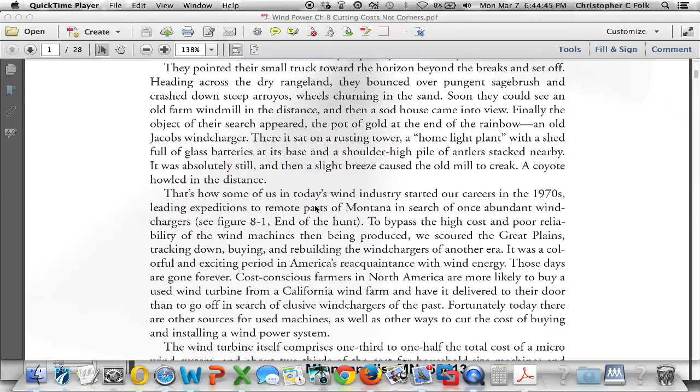What's interesting about this is I think some of this material in this chapter might be a bit dated. And the reason I say that is Paul wrote this book. It was published in 2004, which means much of the research was done in the couple years previous to that. So some of the things he talks about in this chapter about hunting down wind turbines in the Great Plains in Montana and on farms, abandoned in the middle of nowhere, or turbines that come from a California wind farm - many of these machines are no longer available. So because of that, again, I think some of this information might be a bit dated.

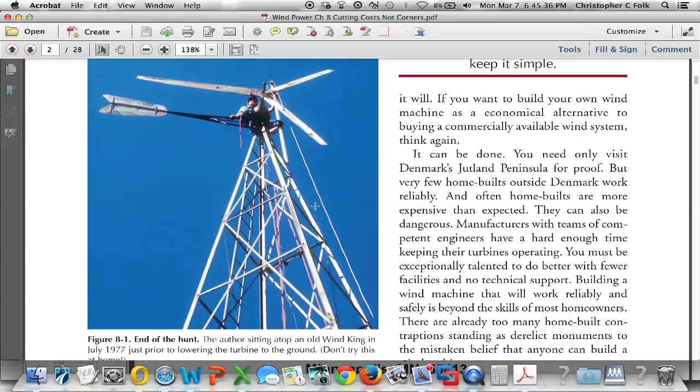As we see some of the photos shown here on the next page, it shows Paul atop of a machine that he found in the middle of nowhere in July of 1977. Not likely that you're going to find something like this anymore.

So I think rather than go through all the examples shown here in the book, I'm going to spend a bit more time discussing some of the machines that you could still find and what they might cost, and then we'll actually use the internet and see if we can find a couple examples of those.

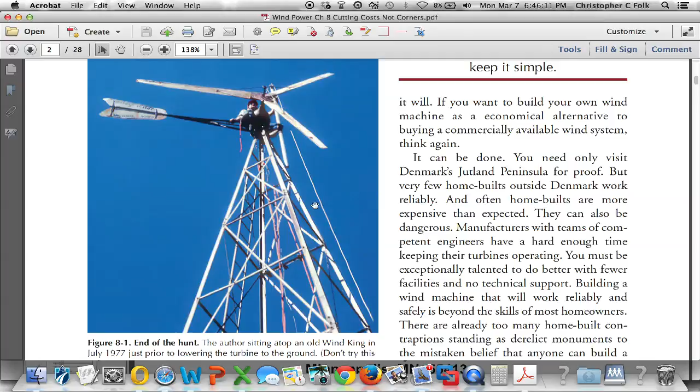So the first thing that he covers is to build a turbine yourself. Why would you want to do it yourself? Well, because you can. It's really interesting. And we've got one right here on page 165. This is one of the plans shown here, and it comes from Hugh Piggott.

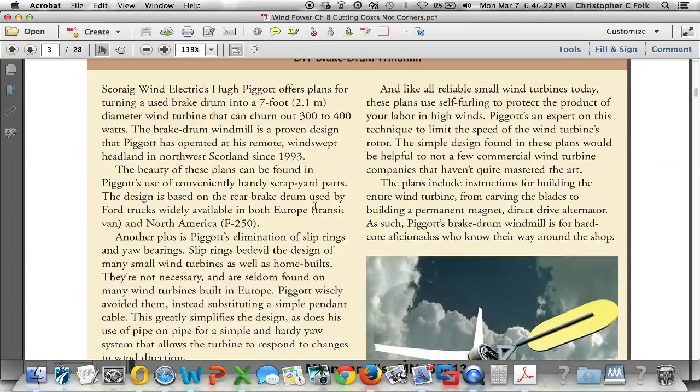Hugh Piggott is a Scottish man that lives on the Scoraig Peninsula in northern Scotland. It's about as far north in Scotland as you can get. Hugh lives off grid up there, and this is his only source of electricity.

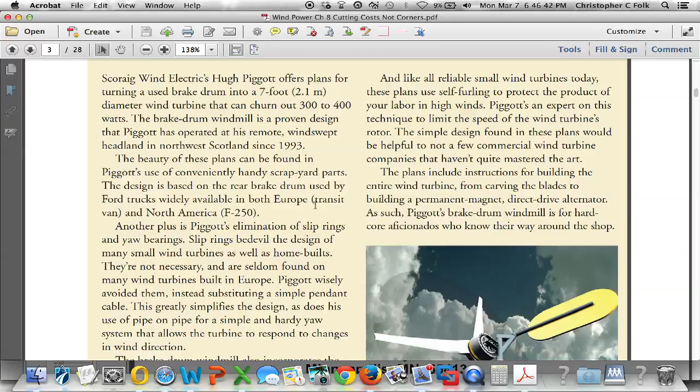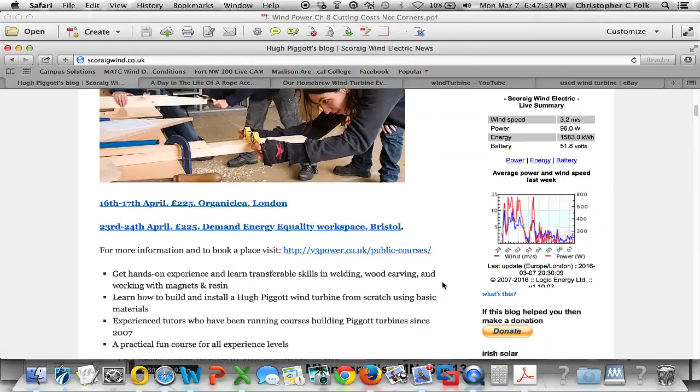So for Hugh, it made sense to build his own turbine. As we look at his website, he shows some of his students building the sites, and yes, they're carving those blades by hand with draw knives and spoke shaves. You can see that he's got a class starting in April, and it's 225 pounds in London, another one in Bristol. So you can see it's a very popular website that Hugh's got here.

I suggest that you go and look at his site because he explains quite a bit on how this would be built, and it's really an amazing design that he has. Notice on this page he has a recipe book, and if you click on the recipe book, you can actually buy a copy of the book so you could build one yourself. Now, Scotland - metric, not inches, okay?

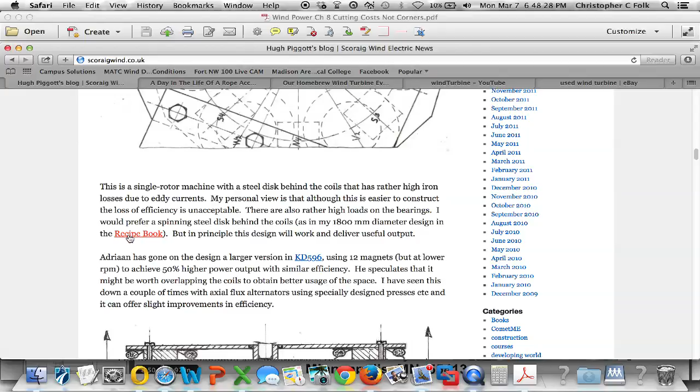Lots of millimeters, centimeters, and so forth, okay? So phrasing will be different. He does offer an English version - loses a little bit in translation, but not too bad. I've actually got a copy of it. So that's one place that we can get a homebrew turbine.

Dan and both of the Dans come to the Madison area every year for the Energy Fair. If you go to the Energy Fair, you'll get a chance to meet them and buy a copy of their book, which is based on their interpretation of Hugh's design, the one we looked at before.

The college does have a homebrew turbine class that we've had on the books for a while. We haven't offered it in the current course number it's in. If there's ever enough interest, we could run the class and build 2 or 3 turbines depending on class size. So if you guys are interested, we can do it, and you could walk out of here with a turbine of your own.

I'm going to get it started. It's only a 3-minute video, and hopefully it'll go back. There's some sound associated with it that I'm going to turn down, and I'll go to full screen. Hopefully it will continue to capture it. And sure enough, it is.

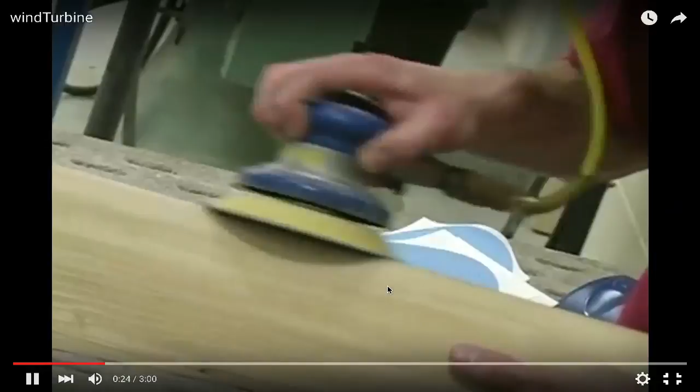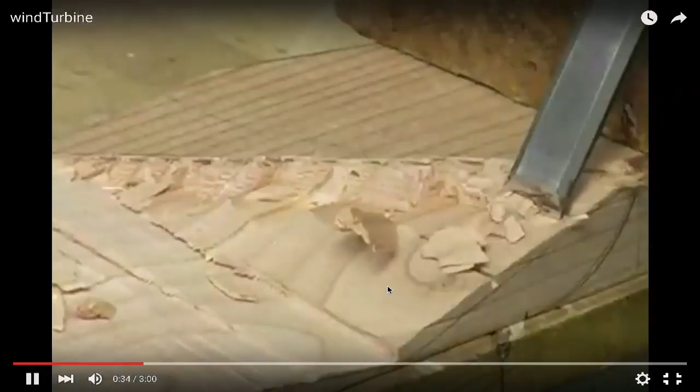There was a student that actually made this video as their part of the project. This is an example of the homebrew turbine, the one I just showed you on otherpower.com. This is an example of how you could build that turbine. This very turbine, one of the ones built here, is the one we use as part of our hand crank turbine demonstration.

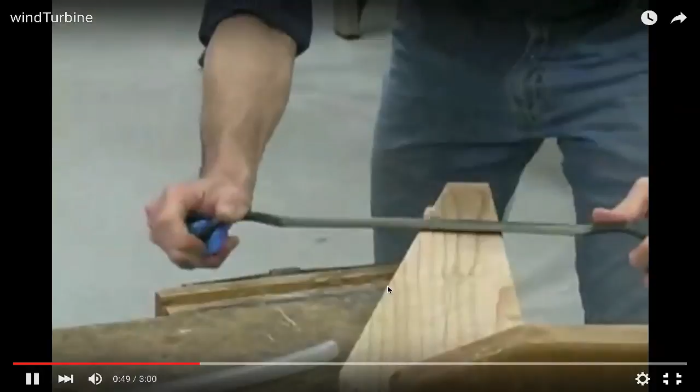The class involved a lot of handwork. That's Ken Walls right there, who was one of the instructors. John Christian, a metals instructor, was one of the other instructors. This is the small turbine that got put together, and it's a really nice video.

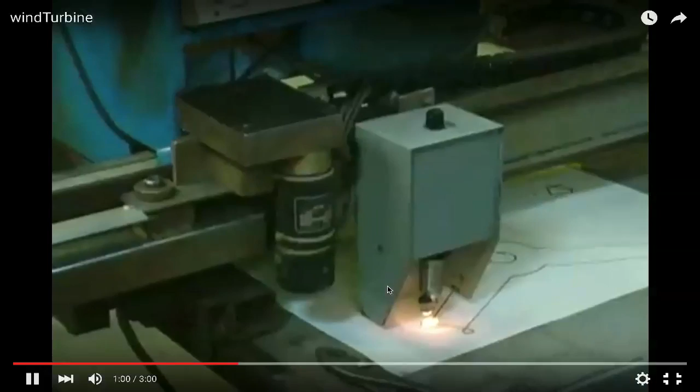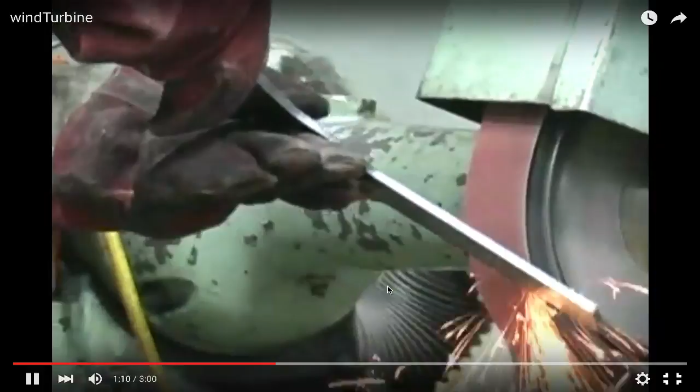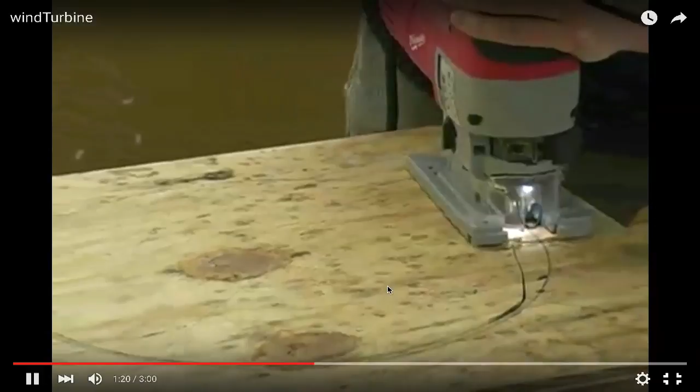There was welding involved. They wound their own windings, cut all the metal, and carved all the blades. This particular one they sent off and had painted. These are all the parts that had to get put together, and this is exactly what you would have to do to build your own wind turbine.

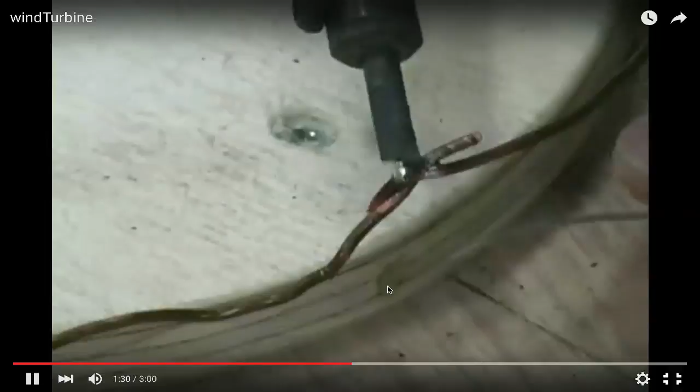It's important that the windings get put in correctly, as you see in this spot here. There's some soldering involved, and that's the stator. After the stator was made, they had to make a mold so the magnets could be put in the exact right spot on the rotors.

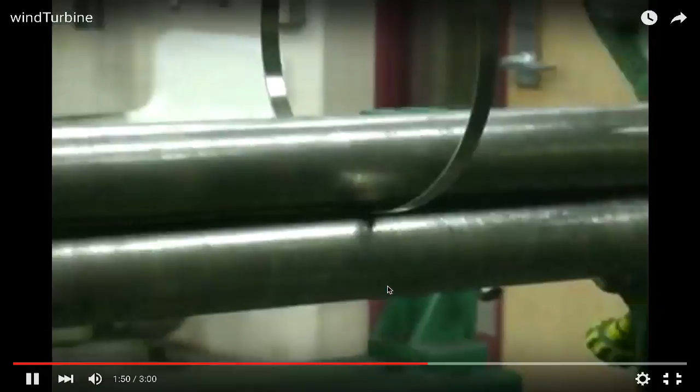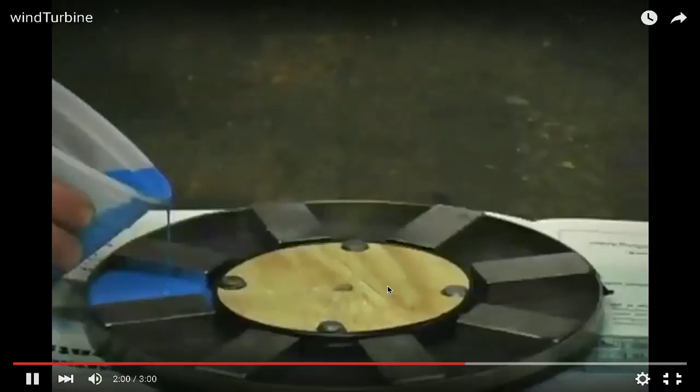The rotors need a metal band around the outside to keep them from flying off—that's what you see happening here. These are the rotors, and they put the plate on there, and those are the magnets getting put in. Then they put together vinyl esters, a type of plastic epoxy, which was put in. This was a little extra work that happened on the lathe, tightening everything down. This is the metal part.

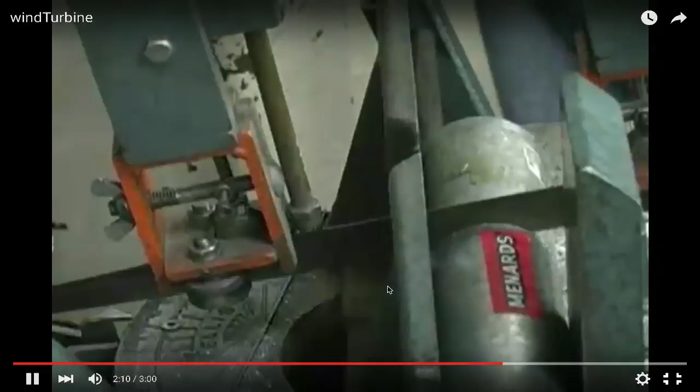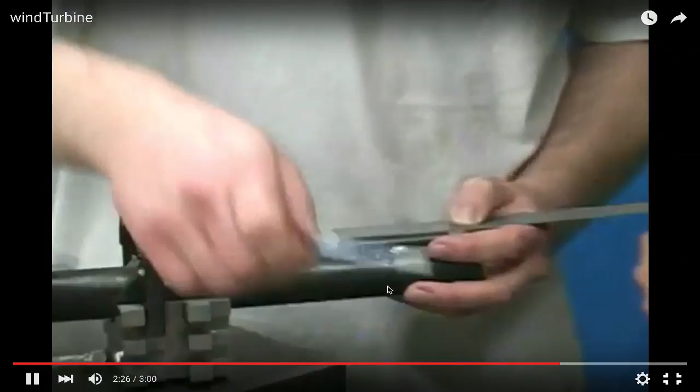They needed to make a tail so it will yaw correctly. They also made a display tripod for it so it could be shown, which has since been lost.

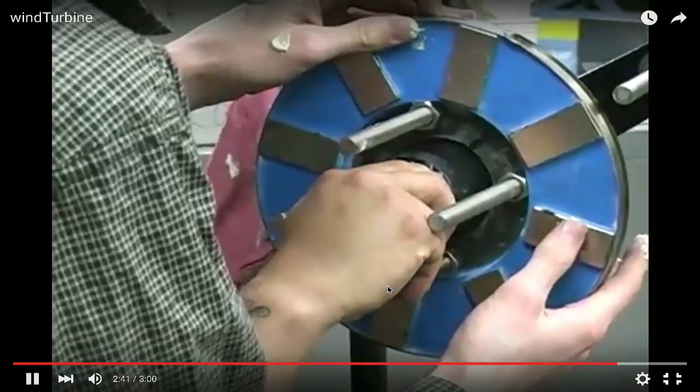By the way, this whole thing starts as a trailer hub, and the trailer hub gets put together, and there it is, all being assembled. This machine we have on a tripod—not the same tripod—and it's available, though we do need to replace the blades because they were broken.

So we're going to cancel that. Again, that was the homebrew turbine, an example of one of these turbines being put together. Back to Paul's book—so that's the homebrew turbine.

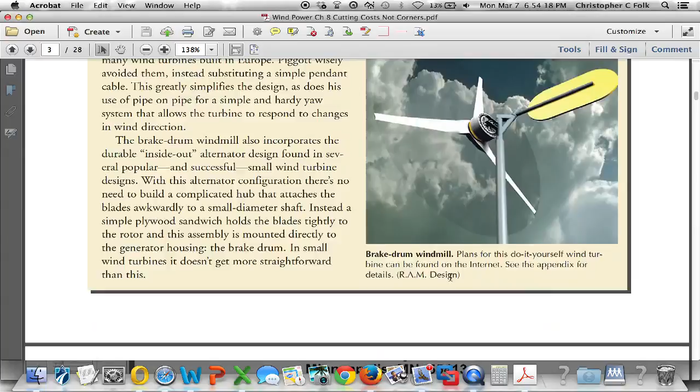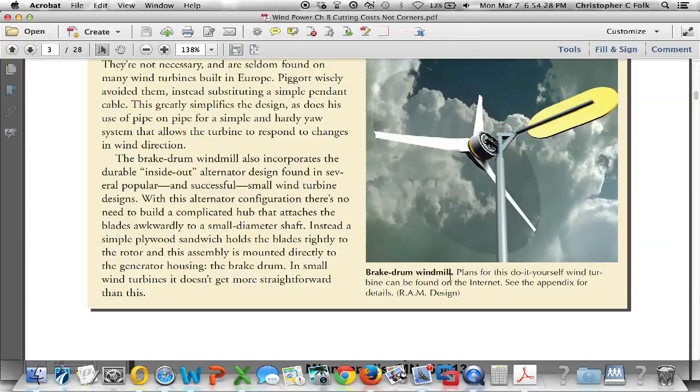This is a bigger one that got built. Home built, but well built. That's a big machine, 22 kilowatts, okay?

This is back in 2004, already 12 years ago, and this was at the Folkecenter for Renewable Energy. It's been going there for 30-some years now. It might be interesting to find out if that is still in operation. Notice the rotor's 10 meters, which is 33 feet in diameter. Pretty darn big.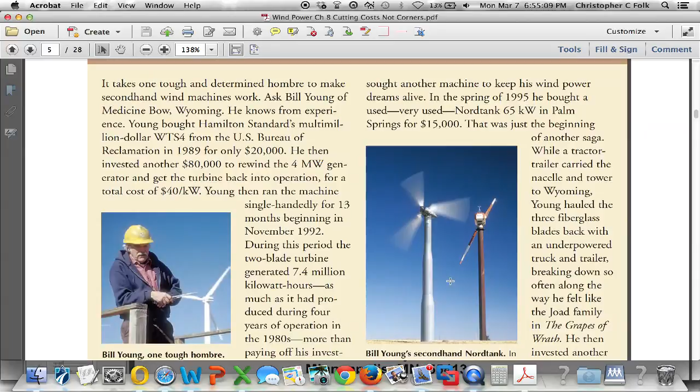Notice he says in here that in the spring of 1995 he bought a used Nordtank 65 kilowatt machine from Palm Springs. Well, if you look through Paul's book, there's lots of shots of a whole bunch of wind turbines all in the mountain areas.

That's the Palm Springs, Palm Desert area, and there's still a lot of those machines that are in place there.

I was recently in California and I saw them myself, and still lots and lots of machines that are flying in the Palm Springs and Palm Desert area. And a lot of those machines are just sitting there.

They're not being used, which means maybe they're not functioning and they're not worth repairing. So maybe that's the kind of turbine you could go and buy.

Well, is that something you really want? Is it going to function for you? You just don't know, okay, so you need to be careful on that. And that's what this chapter is about: how much money do you want to spend for something like this?

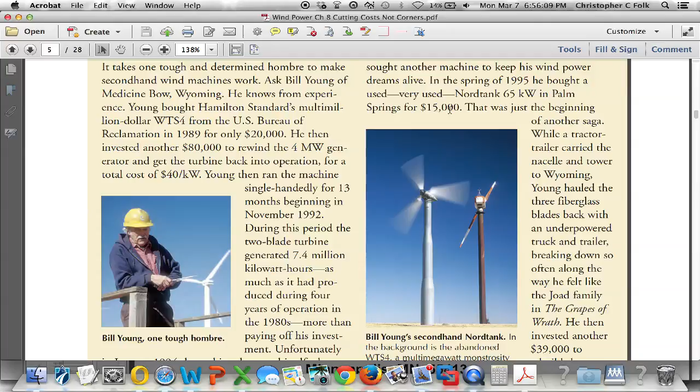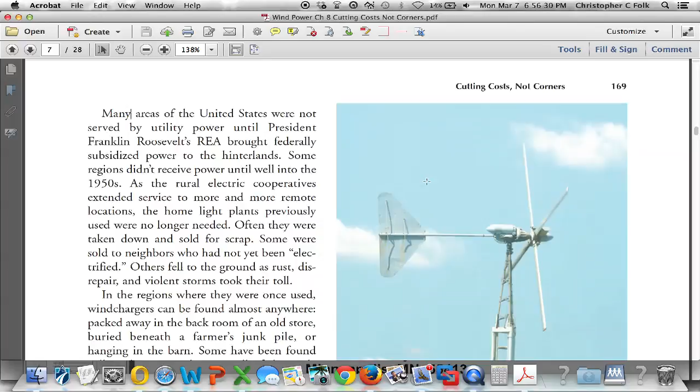Another wind charger, this one from the 50s. Remember, you used to be able to buy these things right from Sears and Roebuck's.

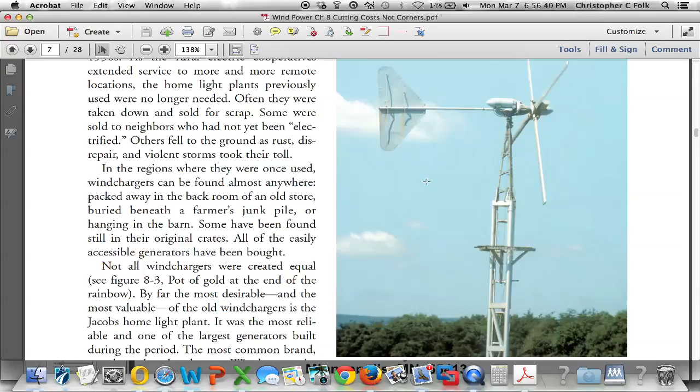So a lot of history in this book. He gets into and talks about machines from the 70s, right? In the 70s...

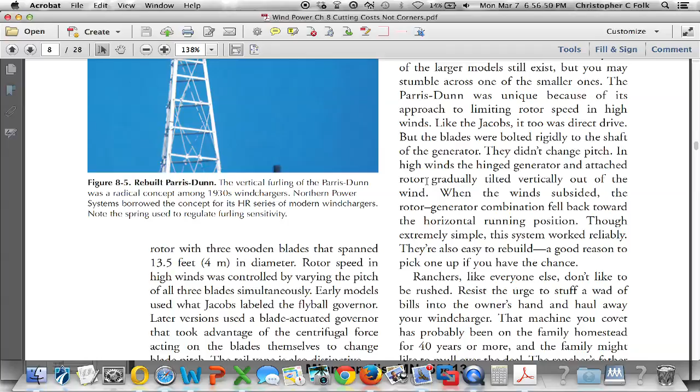...when our first power crunch took off, we were looking for options, and one of the things they did is buy some of the machines that came out of California.

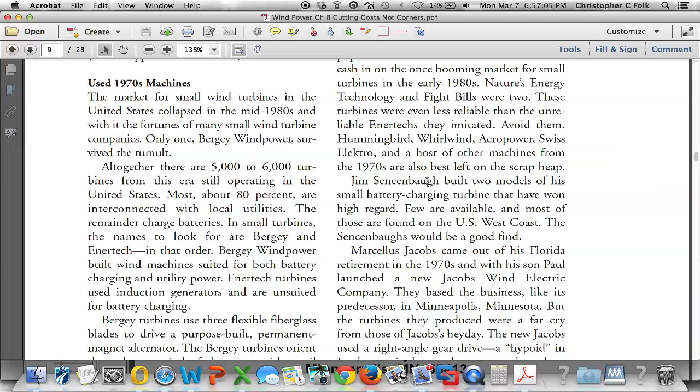We learned about a company named Bergey Windpower. Bergey has been around since then, and they've got a wonderful turbine. We've talked quite a bit about it.

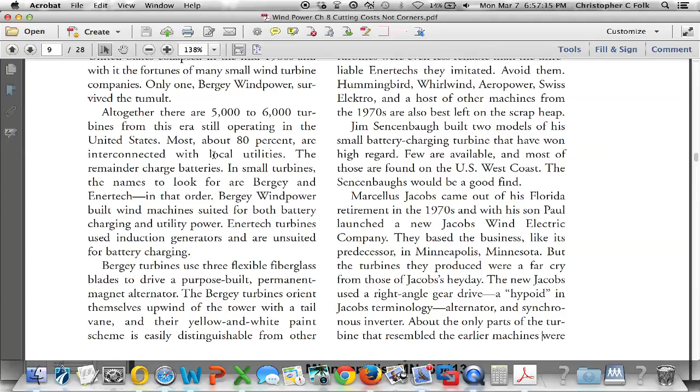There's a couple examples of machines just like this here in southern Wisconsin. There's actually two of them flying up in Custer, Wisconsin at the Renewable Energy Fair. I've been involved in installing and repairing a couple of those, so I can tell you a bit about them. I know there's a couple more in that area, and there's one actually over near Helenville and Sullivan.

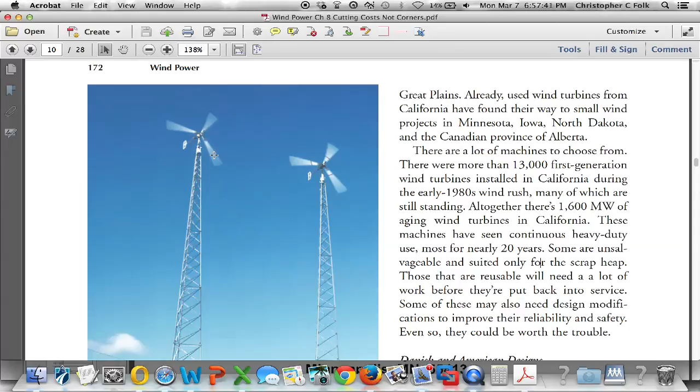So I want to show you a couple others here on the next page, 173, because I did a search on the internet and I found a machine that looks really similar to this.

Maybe not the machine, but the tower looks the same, and it's for sale on eBay, right? So this is one of the places where we might look to find a machine.

So I'm going to go back to the internet, this time to eBay. Now, when you first do a search on eBay, I typed in used wind turbine, and you're going to get all sorts of these goofy little things, right?

Well, do they make energy? Yes. Do they run by the wind? Yes. Are they worth buying? Maybe not, right? These are for people who aren't serious about it.

They think they're going to buy a machine like this and it's going to take them off grid. Well, we know that size means everything, and being able to put it up in the wind means everything. So the first thing you might want to do when doing a search like this is go up to best match.

And this time, let's look at the highest priced ones, okay? Because that's going to get us away from these toys, right? It's going to get us away from these toys, and we're going to see, aha, here is a 180 kilowatt machine.

That is a big machine. That's almost twice as big as the one in Fort Atkinson that we're going to see on our field trip after the break, right?

$100,000. Well, what do we know about it? Let's click on it. Well, we know that it's in Minnesota. It looks like it's been in operation for a number of years.

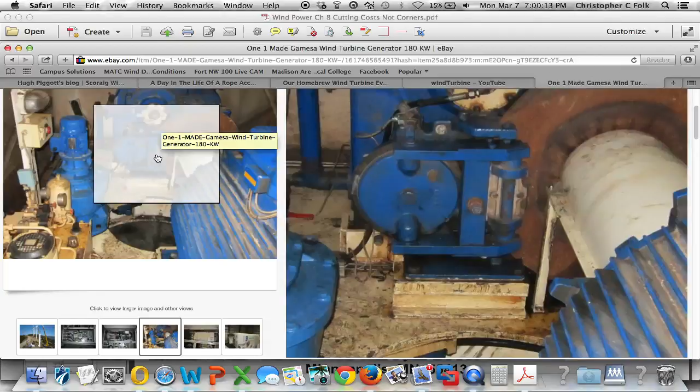So when we look at all these things, we can see there's the gearbox right there. There's the motor, the generator. Come over here, that's the yaw. This is a hydraulic pump, right? So this is going to make the hydraulics that's used to do the work.

I don't know if it has variable pitch. I don't know very much about this machine. This blue motor that we're looking at right here, that's the yaw motor. That's what keeps it turning into the wind. So this is really a nice place for us to do some learning about this.

What else do we have down here? This looks like, what do we have? Okay, so here's the electronics behind it, right? There's the electronics. What could possibly go wrong there?

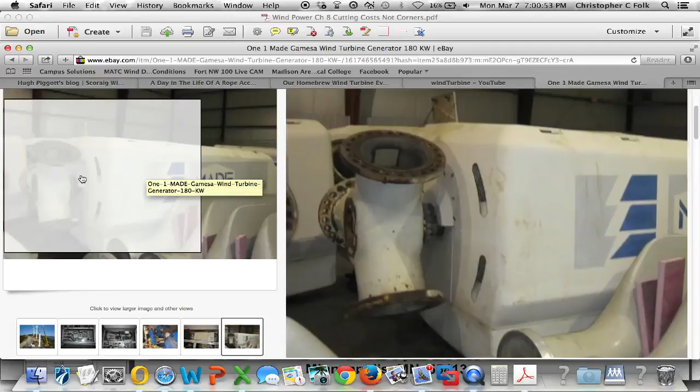And finally, now we can see what the blades are like. So we can see how the blades bolt on. What do you think? Does it look like we have variable pitch on this thing? I'm guessing no. However, if we look at those bolt holes, we can see that they're sort of ovaled, right? So there is an adjustable pitch, but it's a one-time adjustment.

Okay, and so this is a Gamesa, and it says MADE. It's an AE23. So that could start you on some research. Local pickup, $100,000. He's got 6 available. All right, so that's one.

I'm going to go back. What else do we have? Here we've got a 40 kilowatt machine, Aeroman. Where could we learn about Aeroman?

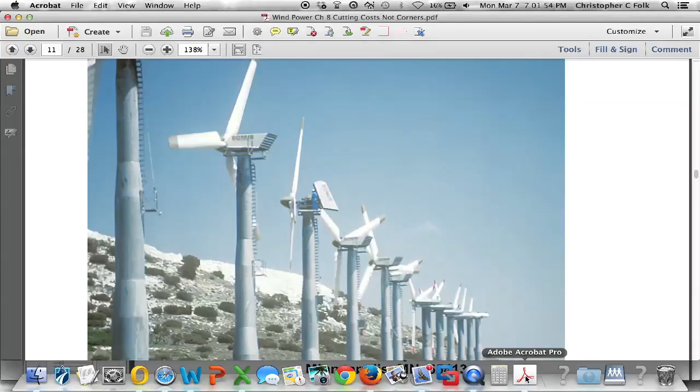If we look back in Paul's book, we're going to see, what do we have here? Let's go back to Paul's book, right? This is on page 173. What are we going to find on 174?

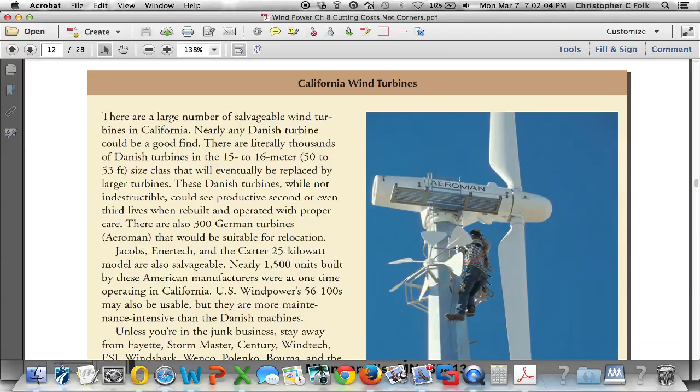There's a California, look at that. There's an Aeroman right there. So there's an Aeroman 2-bladed turbine. Look, it's got this tail rotor here. Holy smokes, so this has a tail rotor.

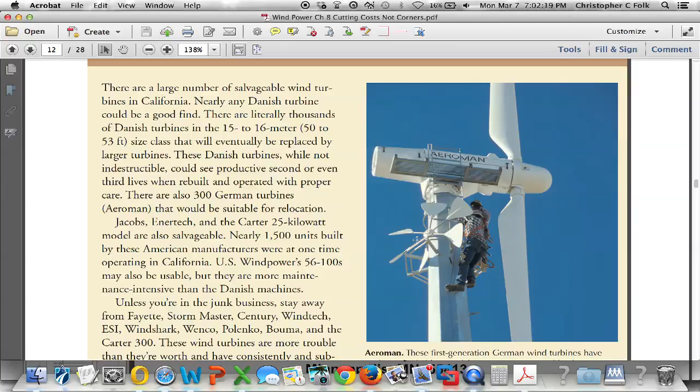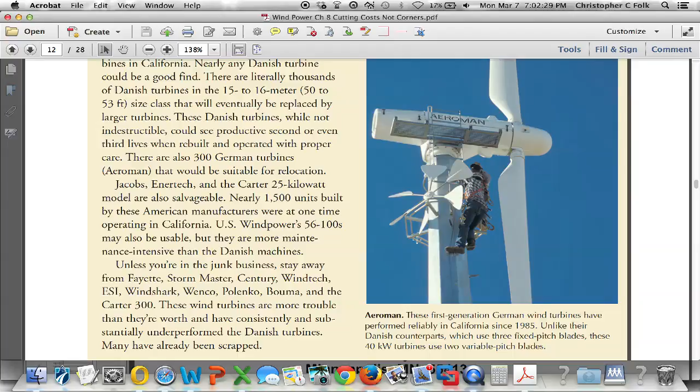It looks to me like... I don't know what that is. I don't know what that is. But let's keep looking down. Aeroman. There's the Aeroman, country of origin, Germany or Deutschland.

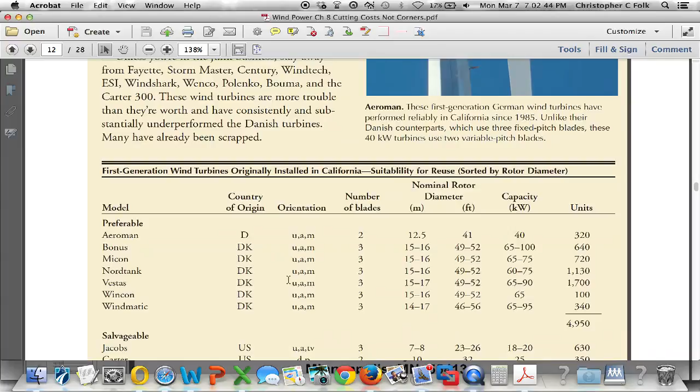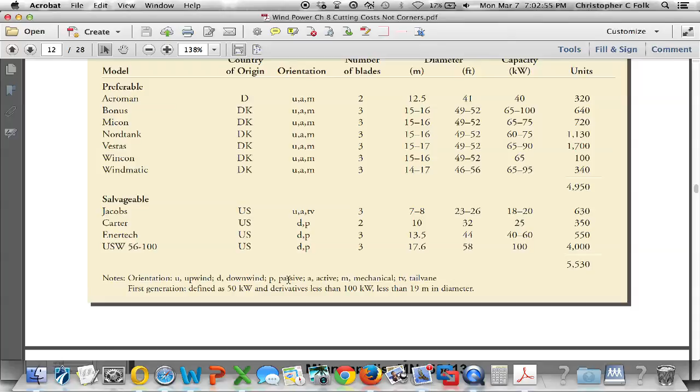I think that's Deutschland, D. The orientation, upwind. Let's see, UAM, what's he telling us about that? So if we look here at the bottom, U is upwind, A is active, and M is mechanical. Okay, so that's the type of yawing it has.

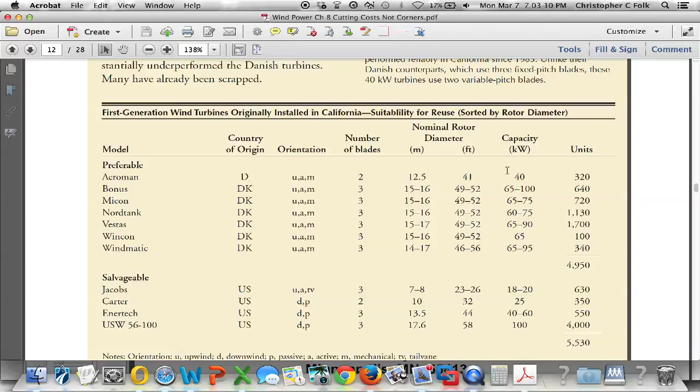Number of blades, it's a 2-bladed machine. It's got a 41-foot diameter, or 12.5 meters, and it makes 40 kilowatts. Well, what does Paul say about this? It says...

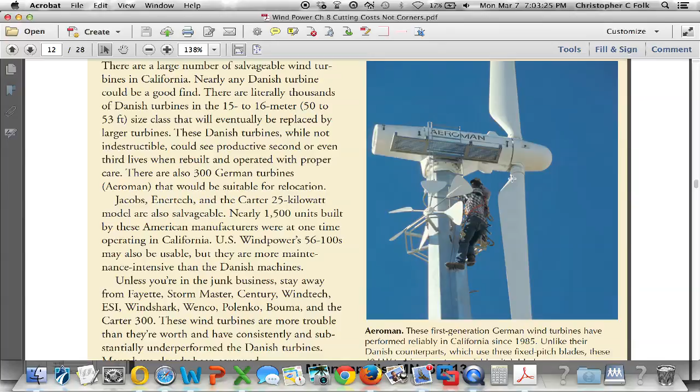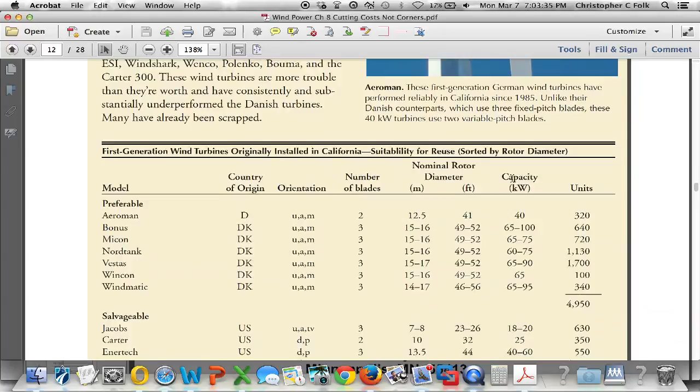I don't see where it tells us to stay away from these, right? First generation turbines installed in California, suitable for reuse. So these are the ones that are preferable. So that is a preferable machine.

So again, if I go back to eBay, what does eBay tell me? eBay tells me that it's $25,000 or best offer. It's located out in Bakersfield, California, just like we thought. And again, it's got that tail rotor thing there.

I don't know what that is. Interesting. What do we know about it? It says fully functioning for a limited time, 25K each, utility scale wind park being sold.

The site's been upgraded for larger machines. They will load it onto your trucks. Okay, you'll get everything above the foundation. That means you get the tower. You get everything. It's a 40 kilowatt machine.

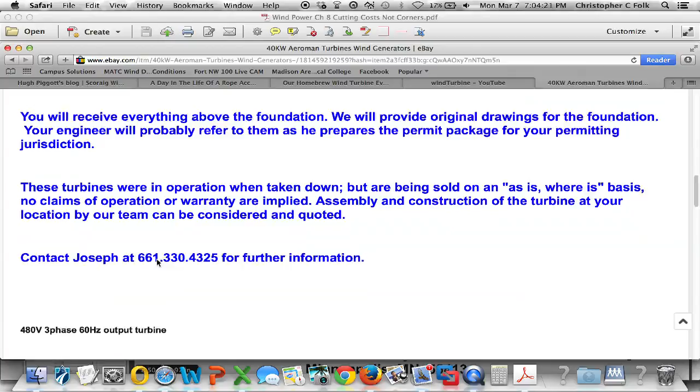That is pretty darn big. What do we know about it? We know it's a galvanized tower. We know it's got the nacelle, the blades, the controller. What don't we know? What don't we know?

How many volts is it? How many hertz is it? Has it been rebuilt? So there's a lot we don't know here. And then you got to go out to California and get it.

How tall of a tower is that? Can we see how tall the tower is? Did it say? These are some of the questions that we would want to find out.

We will provide the original drawings for the foundation, your engineer, blah, blah, blah. Again, as is, where is, you got to go get them. They'll take them down, so they're still in the air. Okay, we don't know how many are available.

Nice, can't see how tall those are. Well, how long did it say the blades were? 40-foot blades, 40-foot diameter, which means this is a 20-foot blade. So if that's 20 feet, from here to here is 20, 40 - that looks like a 60-foot tower. What's that going to do for me in southern Wisconsin? Maybe not enough, not unless I'm in the middle of nowhere and there's no trees around.

All right, so you get what I'm getting at here. So there's an Aeroman, what else do we have? Here's a Bergey 10K. Where's this guy located? 15 grand - that's actually a pretty good price.

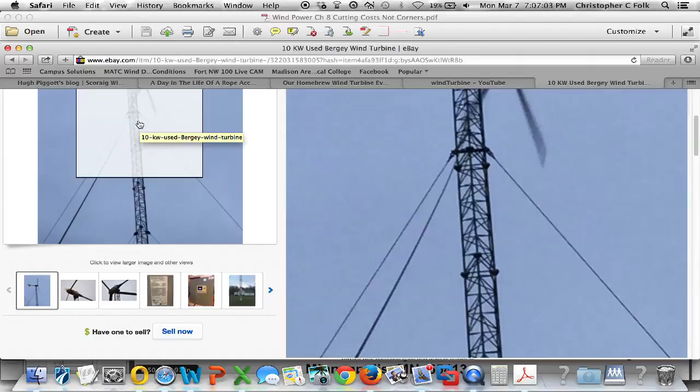Notice here it's only guyed in 3 directions. You can actually build this thing without a crane - you'd use what's known as a gin pole. And that gin pole you would raise up each section as you went, and there's your 10K turbine.

No bids - that's not a bad price. You could install it yourself. Pretty good stuff, 118-foot tower, good sized tower.

Okay, and we start getting into weird stuff too. Look at this one, mounted on the roof. So this is the kind of stuff that you're going to be looking at. Now, this isn't the only place you can find used machines, but it's just an easy place to look.

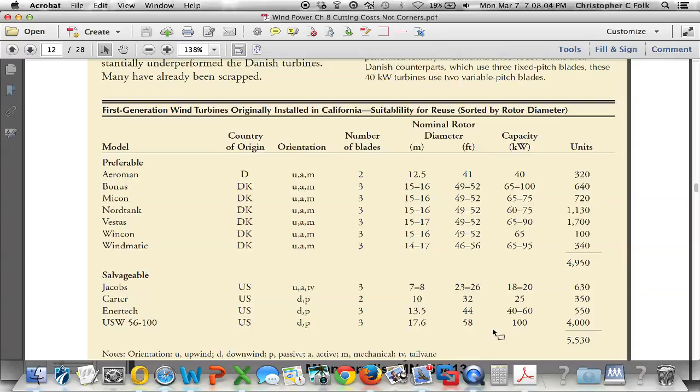So what I like here about Paul's book is that he gives us an idea on what's a good idea, whether you want to buy something or not - things to stay away from, salvageable, things that you don't want to mess around with.

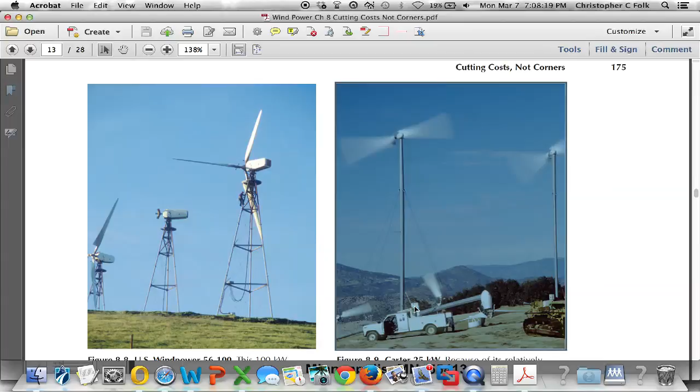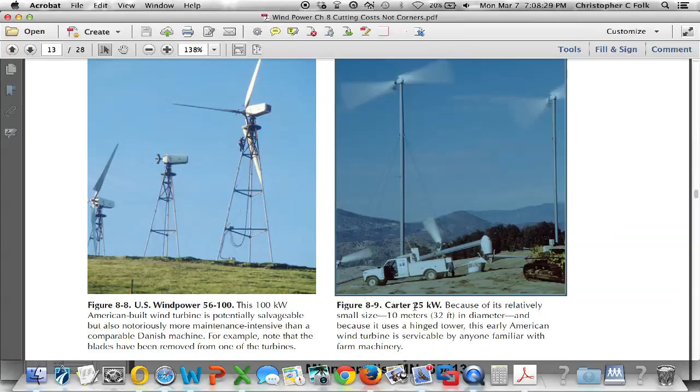All right, the Carter 25 kilowatt machine is one of the ones that he says is salvageable - you kind of want to stay away from them, so he says.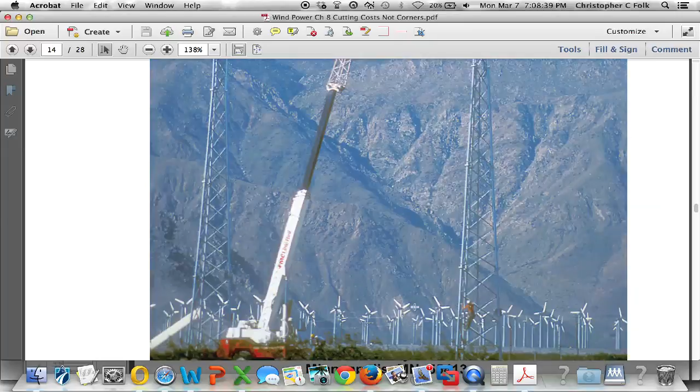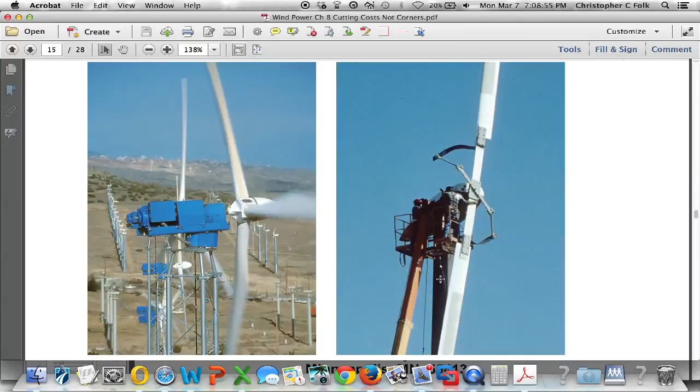All right, so I would like you to read the rest of the chapter, and I would like you to do a little research on your own. This is an example - I think again, this is the Bakersfield area that I told you about, and so there's a lot of machines out there. Some of them are only scrappable, so you want to do your research before you go writing a check for $25,000. That was supposed to be funny.

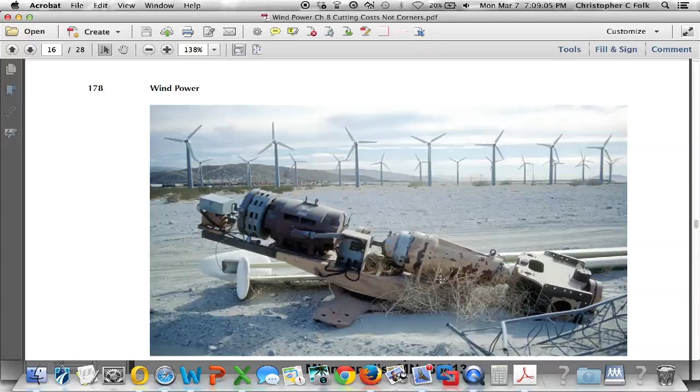Probably don't want that one - might be some scrap value there. Boy, that's going to be heavy though. Palm Springs, again Palm Springs. So,

That sums it up, I'm going to stop this video now. I'm going to suggest that you finish reading this, and there will be an assignment that you go finish reading this, and I would like each of you to do a little bit of research on seeing about finding a used turbine, find out what you can about that turbine, and that could also mean investigating building one of your own.

So your assignment will be to find a source for a used, rebuildable, or do-it-yourself machine, and to get me the specifications on it - what you expect it to provide as far as its output, what you expect it to cost, how large of a tower it would be put on, if it comes with a tower, or if you have to purchase one of your own. So those are some of the things that you would want to look at, and that's going to wrap us up for the end of week 8.